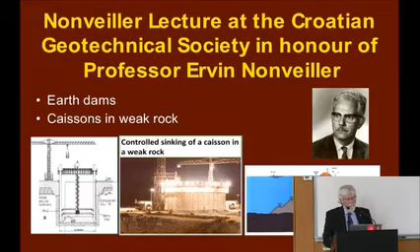In looking at the past history of the work done by Professor Nonveiller, I noticed that we had a number of areas of intersection, including earth dams and caissons in weak rock. But what I'd like to talk about today, environmental geotechnics, has all been developed since he retired.

It is a relatively young sub-area of geotechnique. It includes some very broadly defined areas, including erosion protection, stability in extreme events, management of water in extreme events, and reducing greenhouse gases and global warming.

But what I would like to particularly speak to in this presentation are two issues: the protection of ground and surface water, for example, landfill barrier systems for municipal solid waste, low-level radioactive waste, mine tailings, heap leach pads, and deep disposal of high-level radioactive waste will be touched upon at the very end. And of course, the other aspect is remediation of past sins and contaminated land.

The presentation has two conceptual parts. The first is looking back at the advances that we have made over the last 30 years in understanding different components of a barrier system. We'll be talking about advective diffusive transport through clay liners, and about the importance of leachate collection in landfills and of geomembranes.

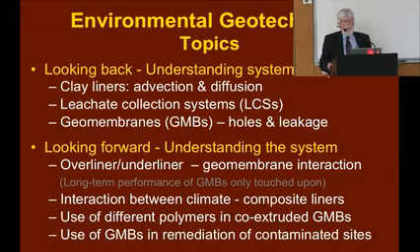But we're also going to talk about the system itself and how the various components of the system interact. We'll talk about the interaction between the geomembrane and under and over liners, the interaction with climate, the use of different polymers, and geomembranes in remediation.

But first, let us start with some basics. There are two transport mechanisms that we have to talk about. One is advection, and that is the movement of contaminants, suspended solids, be they dissolved atoms or molecules, with moving water or leachate. And this is related to Darcy's law.

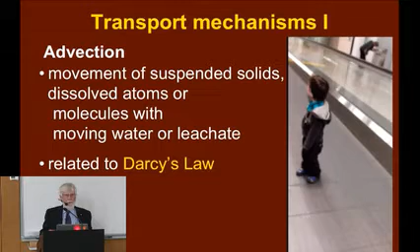To give you an analogy, if we picture this moving walkway in an airport, then the movement of people is going to be related to their concentration, the number of people per square meter on the moving walkway, and the speed of the walkway. So when we're dealing with groundwater, its flux is controlled by something we know very well, the Darcy flux. We'll come back to that.

The second mechanism is a molecular process called diffusion. It is the movement of atoms or molecules due to a concentration gradient, and it can occur with no fluid flow. For example, if we turned off the air conditioning in this room and I opened a bottle of perfume and poured it on this lectern, very soon people would be able to smell it at the back of the room, as it diffused from high concentration at the front to low concentration at the back.

And just as perfume can diffuse through air, it can diffuse through water, contaminants can diffuse through soil, and in some cases even through solid geomembranes. This diffusion process is related to Fick's law. What happens with diffusion is we have a large number of molecules bumping against each other, and they migrate through some medium, be it a soil or a geomembrane, from high concentration to low concentration.

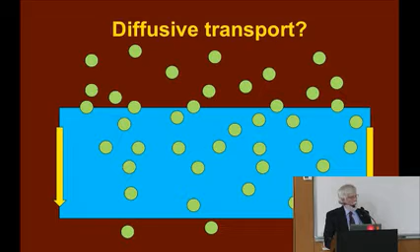So if we consider the advective transport, it is going to be governed by two things. The first we know very well as geotechnical engineers, and that is Darcy's law, which says that the Darcy flux is equal to the hydraulic conductivity times the hydraulic gradient. Now, if we talk about advective transport, we have to bring in concentration of contaminant, so it's simply the concentration of contaminant times the Darcy flux.

And so that flux is related to a resistance. In this case, that resistance is our good friend, the hydraulic conductivity, and a driving force, which is the hydraulic gradient. And if we want to minimize advective flux, there are two things we can do: we can reduce the hydraulic conductivity, or we can reduce the hydraulic gradient.

Now, if we talk about diffusion, it's controlled by Fick's law, which looks very similar to Darcy's law. We have a diffusion coefficient times a concentration gradient.

So let us talk about these various components, and we're going to start with clay. And why not start with compacted clay? Over the last 3 decades, we have come to really understand very well the hydraulic conductivity of compacted clay.

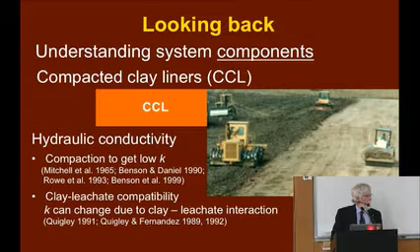Of course, as geotechnical engineers, we have understood hydraulic conductivity with respect to clean waters through dams for a very long time. But what is different about contaminant issues is that hydraulic conductivity is no longer a constant. It can vary because of chemical interaction with contaminants in the leachate. But we understand that pretty well now. We've made good progress there.

What about diffusion? That is much less familiar to geotechnical engineers. But we have great natural analogues since the last glaciation. For example, in Canada, the retreat of the glaciers laid down thick deposits of clay material overlying saline bedrock. Over the last 10 to 12,000 years, salts have been diffusing up through what were clean water, lacustrine deposits.

Now, what about compacted clay in a landfill? We see it there, it just happens a lot faster. Here are 2 profiles from the Keele Valley landfill in Toronto, Canada, taken after only 4¼ years. On the left-hand side, the advective transport through this low hydraulic conductivity clay liner is less than 2 centimeters. But in 4¼ years, chloride has diffused over 80 centimeters. And we can predict it with the same diffusion coefficient that we've used for 10,000 years of data.

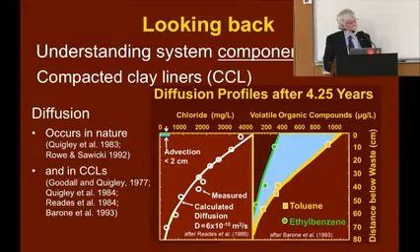It's not just chloride that diffuses, so too do organic compounds, as you can see here for toluene and ethylbenzene. They've migrated almost as far as chloride. So when you have low permeability, you really have to think also about diffusion.

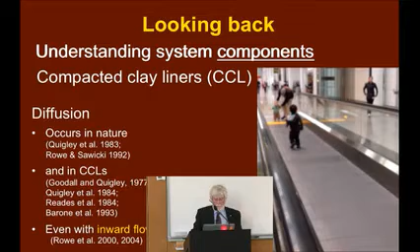Now, I mentioned that diffusion can occur even when you have flow in the opposite direction. We've seen an analogy to that in an airport if you've been waiting and you see a bored child running the wrong way on a moving walkway. Just as that little boy could run against the flow of the walkway, so contaminants can diffuse against an inward gradient. And all of this is entirely predictable.

We must maintain that inward gradient if we want hydraulic containment. But we can't ignore our old friend diffusion. We also have to look at what contaminants can migrate by diffusion out of the landfill, and in fact, that is what controlled this particular design. Now, one of the things that will be obvious to you here is that the whole concept is totally dependent on an effective leachate collection system, and we need it to last for a long time.

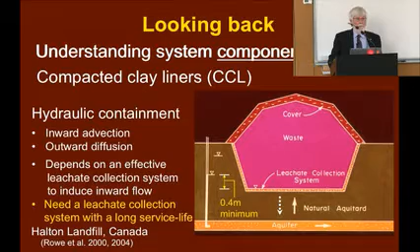So that brings us to leachate collection systems, and we've made great advances there in the last 30 years. If we go back to the 1970s, in some places the 1980s, and some places still today, what they used was a pile of gravel with perhaps a pipe in it, perhaps wrapped in a geotextile, at a spacing somewhere between 50 and maybe 200 meters, what some people call a French drain system. But this is a disaster, because very quickly you get a reduction in hydraulic conductivity in the gravel and in the geotextile, and as that happens, your leachate mound builds up and you get more contaminant transport through your liner because you have a larger downward gradient.

This is a poor design. Don't do it. One of the reasons it's a poor design is the geotextile used to wrap pipes - there's a good reason for doing that in many applications, but it's not the right thing to do in a landfill. This geotextile started with a hydraulic conductivity of about 2 times 10 to the minus 3 meters per second. That's pretty good to a geotechnical engineer. But after a few years, that had dropped by 4 to 5 orders of magnitude to 6 times 10 to the minus 8 meters per second. And now it is not effective at collecting leachate.

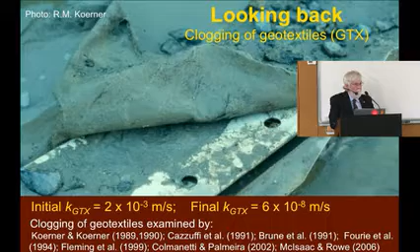And it's not just geotextiles. Sand laid out as a blanket will clog. At the Keele Valley landfill, in a few years, just a couple of years, it had completely clogged and became part of the diffusion barrier, not part of the drainage layer.

This is what we call gravel, less than 10 millimeters. So 10 millimeter gravel - look at it. It's not often you pick up gravel like a piece of concrete, but that's effectively what it's become because of clogging. And this is coarser, 37 millimeter gravel, and you can see it is cemented together.

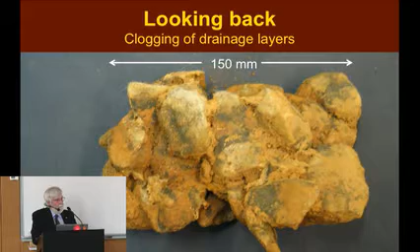So we have to think about that when we're designing our systems. Those bacteria are not benign. They can work for us or against us, depending on how smart we are. And we have to think about the pipes.

Here is an exhumation we did in the early stages of the Keele Valley landfill because the pipe had clogged. Why had it clogged? Because they'd never cleaned it. As you probably know, if you don't clean your teeth, plaque will build up and you'll find yourself having a nasty time at the dentist. That doesn't just apply to humans.

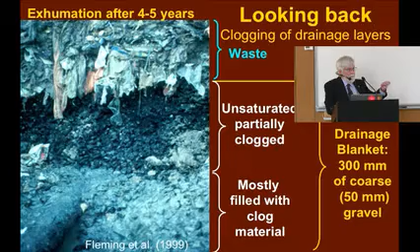It also applies to pipes in the leachate collection system. If you don't clean them, a plaque, a biofilm builds up, and then it becomes solid, and then thicker and thicker. Between 4 and 5 years, you can see this pipe is more than half full of clogged material. Here is a piece we've just removed from the pipe, and this is the same piece after it has oxidized. You'll see it has the appearance of a weak concrete. And that is essentially what it is - a weak concrete formed by bacteria in that pipe in the space of 5 years because they hadn't cleaned it.

So what have we learnt? We've learnt that leachate collection systems have a finite service life, but we can extend it by appropriate design, construction and operations. You need a uniform, coarse gravel layer. You need a suitable filter. Geotextiles can become your friend if you put them in the right place. Get them working for you, not against you.

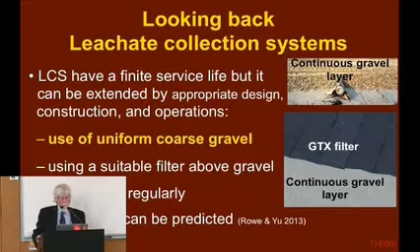Not only should you clean your teeth, you should clean your pipes. And there are techniques available - you can find them on the web - for predicting the service life of leachate collection systems.

So we've just seen a leachate collection system should have a relatively coarse, relatively uniform gravel. Somewhere not far below the leachate collection system often is a geomembrane, a sheet of plastic. And as we know, plastic holds water very well, except if it has a hole. So we need to think about holes.

Two quotes from my old friend J.P. Giroud: all liners leak. And rather than pursuing the unrealistic goal of zero leakage, it is preferable to discuss the limit between acceptable and unacceptable leakage.

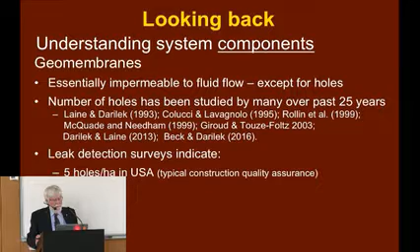So the place to begin clearly is holes. This has been widely studied over the past 25 years, with lots of references in the literature. And what's become a little bit more common, but still not that common, is leak detection surveys. When you do a survey like that, you discover interesting things - like the typical number of holes per hectare in the United States is about 5 holes per hectare, with typical quality assurance procedures. But when you put the gravel drainage layer on top, that can easily go to over 20 holes per hectare.

Now, I said that leak detection systems can help you identify and therefore fix these holes. But in 2014, in the United States, only 2% of the geomembrane had a leak detection survey. Quebec, Canada was probably the best - 21%, which is 10 times better, but still only one fifth of all the area was checked.

So if you want low leakage through a geomembrane, the first thing you need is good quality assurance. That means somebody out in the field who knows what they're doing, who's on site and not in the trailer filling in forms, but there with a pair of eyes watching what's going on. Because a bulldozer blade takes a few seconds to put a hole in a geomembrane and a few more minutes to cover it up if somebody's not watching. There's an old adage that I'll repeat to you: you get what you inspect, not what you expect.

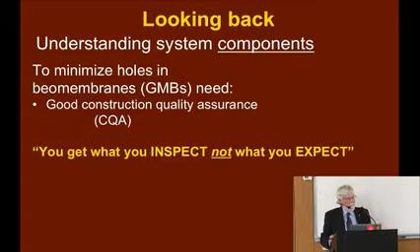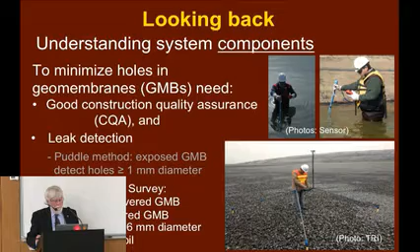When it's covered with water, or covered with soil, you need something like the dipole survey method. With up to 0.6 meters of soil under the right conditions, you can detect holes of 6 millimeters or greater in diameter. So it doesn't eliminate the holes, but you can substantially reduce what is there.

So if all liners leak, we should be discussing what is acceptable leakage. What is acceptable? The answer is, it depends on your particular situation.

If we look at this dam in Italy that's had a geomembrane liner in place for almost 30 years, there's a geomembrane, then a geonet drainage layer, and then the concrete of the dam wall.

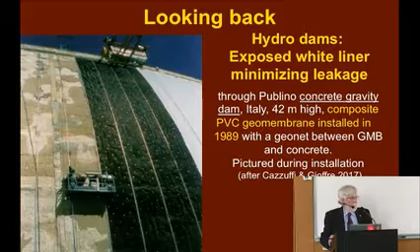And so one could estimate, and indeed because there's a drainage layer there, you can measure what the leakage is. Here's another project I worked on recently in Israel, a pump storage scheme. It's lined with a white plastic, high-density polyethylene geomembrane, and that geomembrane is left exposed.

This is another dam I've worked on recently, in Ontario, and here you can see a geomembrane that is being covered in the bottom of a dam.

So what is the leakage? If we have, as we saw in that Italian case, a geomembrane with a drainage layer adjacent to it, then we can very easily calculate the leakage using Bernoulli's equation.

Let's do that, assuming we have, say, 5 meters head above a hole, and 5 holes per hectare, remember that was the typical value found in the United States with good quality assurance. If our hole is 1 millimeter in diameter, the leakage can be easily calculated to be 2,000 litres per hectare per day. That's a strange unit, but it's what is typically used when we deal with geomembranes, and it's abbreviated to LPHD, litres per hectare per day.

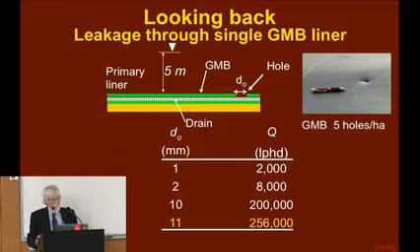Now, is that acceptable? Well, for a hydro dam, it may be perfectly acceptable. But what if it's contaminated water? Then it may be totally unacceptable. So what is acceptable depends on your application.

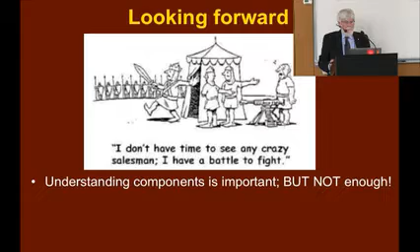So what I've tried to illustrate so far is that we've made great progress understanding things like compacted clay liners and their hydraulic conductivity, diffusion through clay liners. We've understood leachate collection systems and how to design them so they don't fail. We've understood how to calculate leakage through geomembranes. And that's great, but it is not enough.

It is not enough to understand the components. We have to also understand the system, and in particular, understand how the components of the system interact. This can be very important because sometimes we get so excited optimizing one part of the system, like a leachate collection system, that we don't think about what it's going to do to the geomembrane underneath it.

And that has resulted in failures. Indeed, there are some regulations in the world that were written thinking about components, that when you put the whole system together, are actually counterproductive. They're bad regulations.

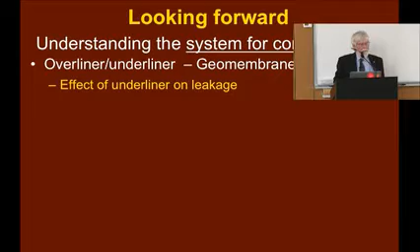So let's look forward. Let's look at understanding the system. A good place to start is with our friend the geomembrane, understanding how it interacts with what's around it, because it's not often that it is in a dam wall with water on one side and a drain on the other side. It does happen, but not that often.

If we do have it, as we just saw a moment ago, and if we take our hole to be 11 millimeters in diameter, our leakage is 256,000, let's say 260,000 litres per hectare per day.

Okay, so what if we had sand instead of a very permeable geonet? That sand has a hydraulic conductivity of 10 to the minus 4th meters per second, which I think we'd all agree is not a bad drain. In fact, it's a good drain. And the leakage is just the same as with our geonet.

Now let's suppose instead of sand, it's a silt with a hydraulic conductivity of 10 to the minus 6. Well, we start to have an effect. There is an interaction between the geomembrane and the soil that reduces the leakage to 100,000 litres per hectare per day.

And if it's a till at 10 to the minus 8 metres per second—a till is a well-graded material, I'm not sure if you use that term in Croatia, it's a very common one in Canada—tills are deposited by glaciers, and they have a range of silts, sands, gravels and boulders. That material is not bad. It gets us down to 1,000 litres per hectare per day. Two orders of magnitude reduction in hydraulic conductivity here gives us a two order of magnitude reduction in leakage.

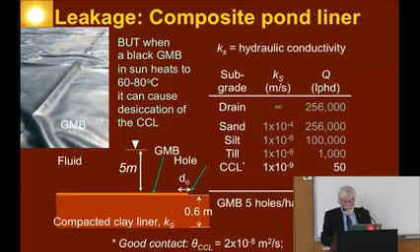However, if we leave our black geomembrane out in the sun, even in Canada it gets to 60 degrees Celsius. If you get to Texas, it gets to 80 degrees Celsius. And what that does is it causes water to evaporate from the clay, especially at the top, and migrate to where the airspace is, which is the wrinkles you can see here—these are wrinkles caused by expansion of the polyethylene when it gets hot. And if we do that, what we can end up with is this: desiccation of the clay liner.

Now, on one hand, you might be tempted to say, well, it's just a few centimetres, what does it matter? Well, it matters a very great deal, because now the water can easily migrate through that fractured network at the top over the entire surface. So we now get an increase in leakage from the lovely 50 we had before to 8,000 litres per hectare per day—all because of construction considerations. This is probably not what the designer expected, but it's what you can expect if you don't pay attention.

So what are some solutions? Well, one solution is to use a white geomembrane. It doesn't solve the problem, but it helps, because it drops the temperature in our measurements by about 20 degrees on a hot day. What this illustrates is we have to consider the interaction between the liner system and climate. A white geomembrane helps. A GCL, a geosynthetic clay liner, either with or as a replacement for the compacted clay, is a good thing to consider.

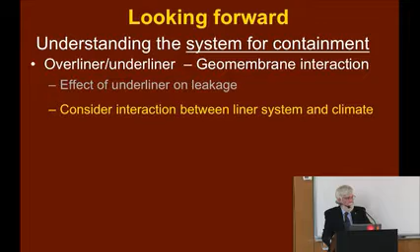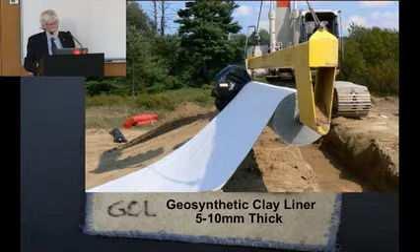Oh, but what is a GCL? I haven't introduced that to you, so it must be time to do so. A GCL is a manufactured product. It comes in a roll, as you see here, typically 5 to 10 millimeters thick off the roll. In 95% of the cases, it is a layer of bentonite, typically sodium bentonite, not always but mostly, sandwiched between two geotextiles, and all needle punched together to hold it together, first and foremost, so it can be rolled up and easily laid out on site.

Now, bentonite on the roll has a low water content. And for bentonite to have a low hydraulic conductivity, it has to be hydrated. So where does it get its water? Well, basically, it sucks it up from the soil beneath it. And a GCL taking up moisture from a good subgrade will typically have a hydraulic conductivity less than 5 times 10 to the minus 11 meters per second with respect to water.

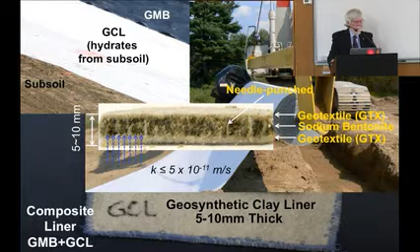And for that reason, we often use a geomembrane together with a GCL on a subgrade as a composite liner, and they've been very effectively used for more than 20 years. But we do need to pay attention here too—it's not just compacted clay that can be affected by our interaction with climate.

It's to study this particular problem that we first built the Queen's University Environmental Liner Test Site, or QELTS. It's located just north of Kingston in Ontario, Canada. We've built it once, monitored it for 6 years, then completely pulled it apart and rebuilt it, and we've now been monitoring it for another 6 years. We're studying many things, but the one thing I want to talk about today is shrinkage.

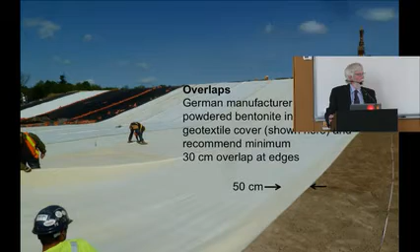To put this in context, GCLs come in a roll, they're laid out like this, and depending on the manufacturer there will be different recommendations about how you seal the overlaps. One manufacturer, a German company, impregnates bentonite in the 50 centimeters from each edge, and they recommend overlapping by 30 centimeters. That impregnated bentonite provides a seal between the two geotextiles, and remember, geotextiles can be permeable.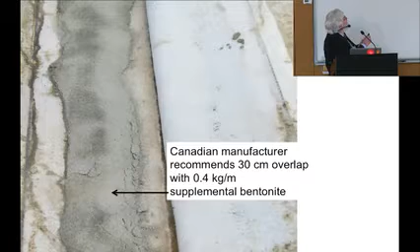We need the bentonite to seal it. Now that's not the only way to do it. Here is a Canadian manufacturer who recommends placing 0.4 of a kilogram per meter of supplemental bentonite between the lower and the upper panel. You can see I folded back the upper panel here so you can see the bentonite. They also recommend a 30 centimeter overlap. Here's a third option: a US manufacturer who puts in a groove, typically about 7 to 8 centimeters from the edge of the roll, relying on the bentonite that comes from that groove to provide the seal. This manufacturer typically recommends a 15 centimeter overlap.

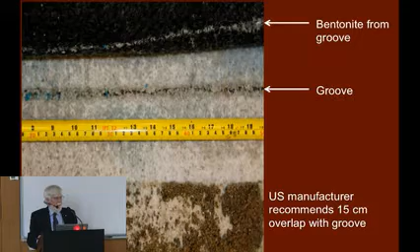Okay, well, that's all well and good. Under the right conditions, all of those systems work. Well, what are the right conditions?

One of the good ways to find out is to read the manufacturer's instructions. Unfortunately, not only do we typically not read other instructions, we often don't read the manufacturer's instructions. If we read them, they would say, whether you use the GCL alone or as part of a composite liner, cover it in a timely manner. Unfortunately, this is a recommendation more honoured in the breach than the observance. Very commonly, composite liners are left exposed for months, and in the case of side slopes, often for years before they are covered.

So the question we should ask ourselves is, what are the consequences of that? And the answer is, it depends.

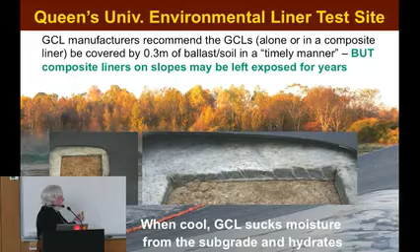Let's begin with what we'd like to happen, and often, in fact, it does happen. We put the GCL on top of the subgrade, the geomembrane on top of that, and the GCL sucks up the water. Relatively quickly you get this nice gel-like structure. This has got low hydraulic conductivity. This is beautiful. If it stays like that, we'll be really happy.

But if we leave our black geomembrane out in the sun, it is going to get hot. And when it gets hot, not only will water evaporate from a compacted clay liner, it will also evaporate from our GCL. And when it goes into the air, where is most of the air? In the wrinkles, which are where the geomembrane has buckled as it expanded. And when the geomembrane cools, that water condenses, but it doesn't go back to where it came from.

We're going to look at one of the consequences of that, and remember, this is all about weather, how things happen in real life. This is data from our air temperature monitor at the QELTS site. Now QELTS is at latitude 44 degrees, 34 minutes north. Interestingly, that's a little south of where we are right now in Zagreb. Zagreb, when I looked it up, was 45 degrees, 48 minutes north of the equator. So Canada's not all a long way north.

This is what the weather looks like at our QELTS site. You can see in the summer we can be up to, in this year, about 32 degrees Celsius. In the winter it got down to about minus 28, with ups and downs in between. Now that's the ambient temperature, but the geomembrane is a very different creature. Look at it, it rarely dropped below freezing. Lowest it got to is minus 5. But it got up in this particular year to almost 60 degrees Celsius.

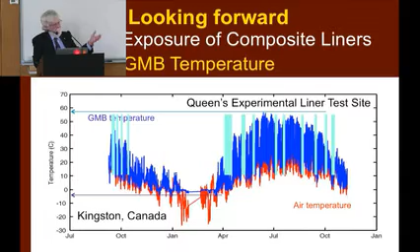And look at those cycles. The ones I've highlighted in aqua and light green show a period for it to hydrate, followed by a very hot period. So our GCL is going to have time to suck up water, then it's going to have a period when it's hot and it evaporates water. It sucks up, it evaporates, it sucks up, it evaporates.

Well, what does this do? Here we see a GCL specimen. This is a very common GCL, I've even seen it in the labs here at Zagreb today. You can see this specimen starts off parallel to this yellow line and this yellow line. What we're going to do is look at some time-lapse photography where we wet it and then allow it to dry overnight. Then we wet it again, allow it to dry out overnight, and let's see what happens.

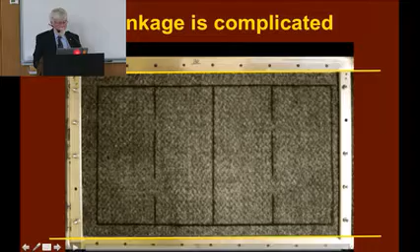And you can see after a few cycles, it is no longer aligned where it started. It has shrunk.

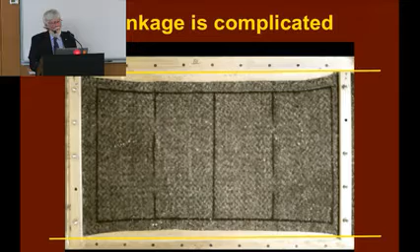Okay, well that's all very nice and good. You know that certain clothing items, if you don't look after them properly after you wash them, will shrink. You now know that some GCLs will shrink. Why do we care? The answer comes back to the overlaps.

So this is what we would like to see. And here we have our overlap. We have our supplemental bentonite, which provides a resistance against flow between the two panels. And as it's shown there, it's exactly as we would like to see it.

But let's suppose that GCL panel shrinks. Once it shrinks away from the supplemental bentonite, now remember that how much supplemental bentonite you've got depends on which manufacturer's guidelines you followed. Three very different answers you could get. But once it shrinks away from that supplemental bentonite, now we have a clear flow path between the panels, even if an overlap exists when you look at it with your eyes.

So you could walk on it and say, oh, that looks all right. What you can't see is that it may have shrunk away from the bentonite. Now, in some methods of doing it, that's much less likely than other methods. So think about that. Here's an obvious problem. Now we have a gap. So now we have a geomembrane with a drain beneath it.

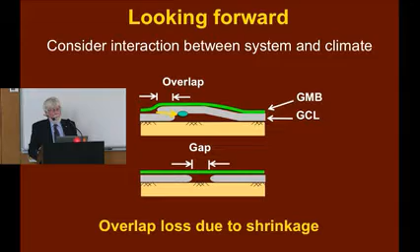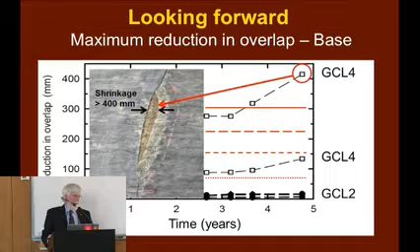That's good. Now we looked at what happened if that overlap shrunk so it was only 50 millimeters, and so that the supplemental bentonite was disengaged. So visually it looks okay if you're looking at it from the top.

But the leakage increased by a millionfold. This matters.

So shrinkage depends on how the GCL is manufactured. It depends on your field site conditions. But if you want to minimize it, the first and best thing to do is follow the manufacturer's instructions.

Cover it as quickly as possible, and if you do that, none of the GCLs will give you a problem. If you can't do that, then you have to be a lot more careful. Now you have to select a GCL to minimize your risk. They are not all the same.

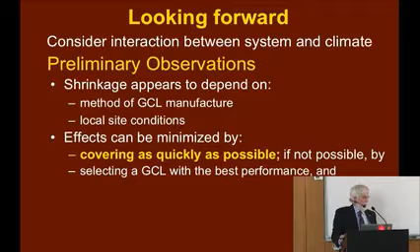You need to ensure an adequate overlap. I would recommend 300 millimetres. You can do something called heat tacking the seams sometimes, and that helps, but it's not a guaranteed solution.

A white geomembrane reduces the thermal cycles. It helps, but it is not a solution. The solution is to cover in a timely manner.

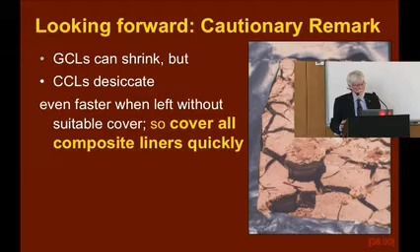So GCLs can shrink, but compacted clay can desiccate even faster. So you have to be careful with what's going on in construction. Shrinkage can be minimized by appropriate design and construction.

Okay, we've talked about what's underneath the geomembrane. Let's talk about what's on top of it.

If we look at what we've already discussed, we've seen that if we have a subgrade at 10 to the minus 6, and a permeable material directly on top of it or nothing on top of it, our leakage is 80,000 litres per hectare per day. If we were putting a cover soil on top at 10 to the minus 5 metres per second, so it's a sandy material with a bit of silt maybe, and we've got the same subgrade at 10 to the minus 6, we drop the leakage to about 70,000 litres per hectare per day. Not very much.

That cover soil above it generally has very little effect. But what if that cover was thick and of a significantly lower permeability? Where, you might ask, would you find that? My answer is a tailings storage facility.

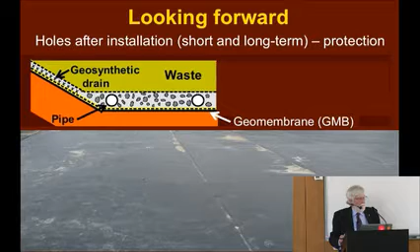Okay, so we've been talking about holes after installation. One of the important things we need to think about is how we protect our geomembrane. We've talked about it being good to have a coarse, uniform gravel drainage layer. But if we put that directly on the geomembrane, it's probably not going to be very kind to it. Well, people recognise that and put on a protection layer, typically a geotextile protection layer.

You can see one here. Then you put gravel on. If we're lucky, it's nice, rounded river gravel. But we're not often that lucky. Often it's crushed gravel that looks like this. So what does that do to the geomembrane?

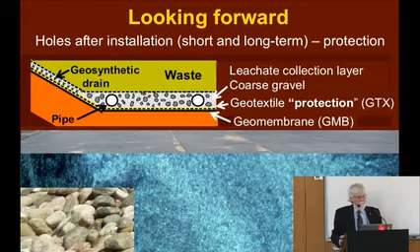Well, to find out, let's build a liner system. We'll put a foundation layer, a GCL, a geomembrane, a geotextile, some gravel, and in our landfill liner simulators, we can load that up to 3 megapascals. Too big for a landfill - landfill is typically less than 1 megapascal - but for a heap leach pad in mining, even 3 megapascals is not the top end.

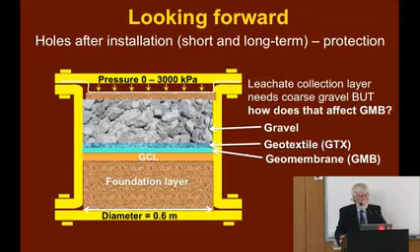And we can ask ourselves, how would this drainage layer, either in a landfill or in a heap leach pad, affect the geomembrane? So here is the material being placed, a foundation layer, a nice pristine geomembrane. Here's the gravel that's being used.

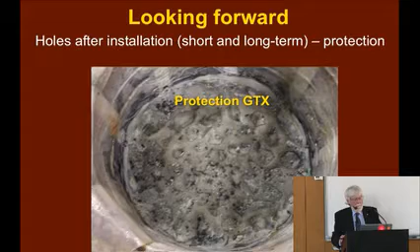Now we've loaded it to 250 kilopascals and we're taking off the gravel. This is the protection layer, and you can see the indentations in it. As we pull back that geotextile and look at the geomembrane, you can see that those gravel particles have indented through the geotextile into the geomembrane. In fact, you can appreciate, even if there are no holes, there are some big strains.

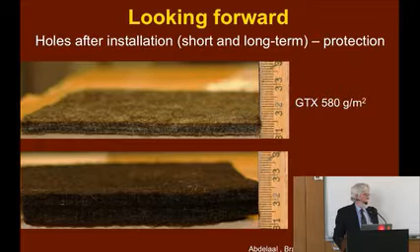Let's ask ourselves, what's the effect of the mass of that geotextile? Well, if we have none, at 250 kPa, which is a medium-sized landfill, maybe 20 meters of waste, we get strains of 17%. To put that in context, the Germans, Seeger and Müller, made a recommendation, which I think is a very good one, not to exceed a strain of 3%. If we take that as a guideline, clearly 17% doesn't meet it.

If we use a light geotextile, we get 10%. A reasonably heavy one, roughly twice what is typically used, we're down to about 7.7%. A 2,000 gram geotextile, we're at 5.5%. With 150 millimeters of sand, we're at 0.2%. Draw your own conclusion.

Now, why do we care? If there's no hole initially, why do we care? The answer is, where the geomembrane will fail is where there are tensile strains. And let me prove that to you.

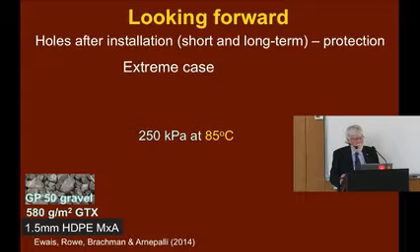Let's take a geomembrane 1.5 millimeters thick. We'll put on a typical North American geotextile protection layer of about 600 grams per square meter, and a typical drainage layer used in Ontario, where I live, 50 millimeter gravel. We'll take a medium-sized landfill, 250 kilopascals, but this data we'll do at 85 degrees. That's pretty extreme, so things happen a bit faster.

At 20 months, we had one crack. One crack doesn't sound so bad until we remember it's a 0.6 meter diameter specimen, and we're used to talking about holes per hectare. So what does that mean in holes per hectare? It means 35,000 holes per hectare. That's getting to be a large number.

But even more importantly, once the cracks start, they grow exponentially. So this is at 20 months. At 24 months, we have 400,000 holes per hectare. At 25 months, 1.4 million holes per hectare. And at 25.5 months, 2.2 million holes per hectare.

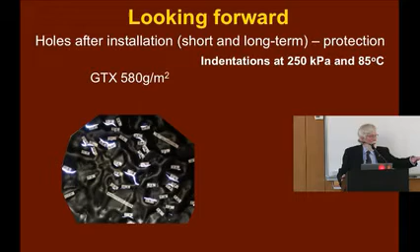And that's what the geomembrane looked like. I think we can probably agree it has reached the end of its service life. You see the light because we're sitting on a light table. So there are quite significant cracks there, both in width and in length.

So with a 600 gram protection layer, we've got strains up to about 15% and 2 million holes per hectare when it starts to crack. And that happened within 3 years.

This is exactly the same geomembrane under exactly the same conditions with one exception. We used a 150 millimeter sand protection layer. And it looks as beautiful as the day it was put in. That test has been running now since 2006, so 12 years, not a problem, performing beautifully.

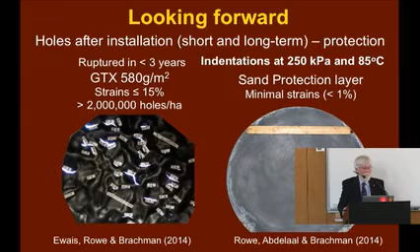It's not about the geomembrane, it's mostly about what we as engineers do in our design. Your protection layer is critical. So, with a very coarse gravel drainage layer, we need a very, very thick geotextile, or, because that's going to be very expensive, maybe a sand protection layer instead.

Now, another way we can get strain is from the consolidation of the waste. As geotechnical engineers, any of you working with piles and soft ground are probably familiar with negative skin friction, when the soil that's consolidating starts to drag down the pile. Well, we have a similar situation for a liner system in a landfill.

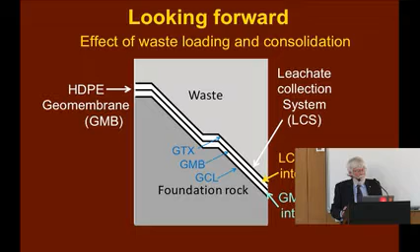We put waste on top of the liner system. The weight of that waste itself tends to drag down because of the friction between the layers, and as it consolidates and degrades and settles more, we get further down drag. And that induces tensions in our geomembrane.

And there are ways to calculate that. Here you see some results for a particular case. I won't go into the details of the case, it's just been published in the Canadian Geotechnical Journal. But you can see near the top of the slope, these are breaks in the slope here.

Near the top of each of these slopes, you get the maximum strain. With a one-to-one slope, it's almost 9% at closure, and with degradation of the waste it increases to about 19%. Compare that to Seeger and Muller's 3%.

With 2-to-1 slopes, at closure we're at 4.4%, after waste degradation 11%. With 3-to-1 slopes, life looks a lot happier - we're at 2 and 2.1%.

So once you go over 3-to-1 slopes, you have to pay a lot of attention to what the strains may be in your particular geomembrane. That may mean you have to use some reinforcement to carry the load so it's not carried by the geomembrane.

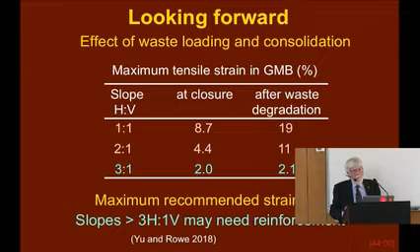So we're getting towards the end here. I have been mostly talking about leakage, but I want to come back for a little while and talk about diffusion. Traditional geomembranes are excellent diffusion barriers to most contaminants in a landfill, anything that's ionic, salts. I've been running a diffusion test continuously for 25 years and have found zero salt getting through a geomembrane.

But for other contaminants, such as benzene, toluene, dichloromethane, TCE, PCE, for a typical geomembrane I only have to run a test 1 to 2 weeks, and it's significantly through the geomembrane. Now what this has caused is the development of new products designed to deal with this situation.

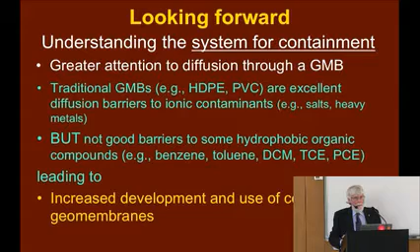So let's look at a diffusion test. Here we have a cell, it has a geomembrane here, a source of contaminants on this side, clean water on that side. We monitor the decrease in concentration in the source and the increase in the receptor. In particular, what I'm going to highlight for you, since maybe many of you have never seen this, is a co-extruded geomembrane.

It has a traditional polyethylene outer core, could be linear low density or high density. But in the core, in the center, it has a material called ethylene vinyl alcohol, or EVOH, which is particularly good at containing or stopping those contaminants that easily get through polyethylene.

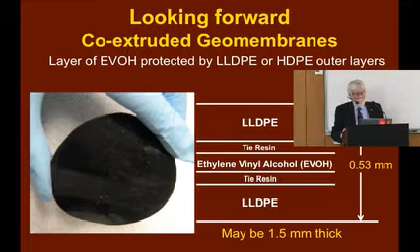We've been running that test now for 8 years, but we predict we're going to have to run it for 16 years before we get to equilibrium. Compare 16 years to 14 days. Not all geomembranes are the same.

Just to give you an example of how this can affect your design: often we have to build over soil that we've tried to clean up - we've made a good effort, but there's a limit to how much you can clean it up economically. And now we want to use it, we want to build on top of it. It's what we call a brownfield site in North America. Let's suppose we want to build a 5-metre high warehouse.

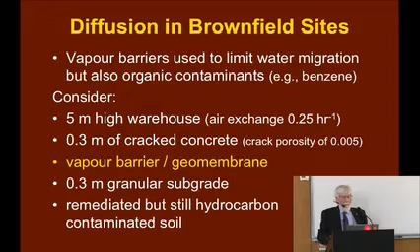In the US, a typical guideline is the NIOSH, and in that building you shouldn't exceed about 3 milligrams per cubic metre.

Now I'm going to finish off by a few words about radioactive waste, because I gather that's of some interest in this part of the world, as it certainly is where I live. We'll start at low level and then we'll finish off with a few words about high level.

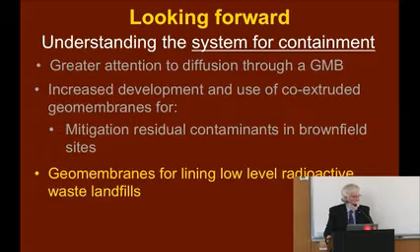So if we have low-level radioactive waste, we need a good liner and a cover. They're typically disposed of in a secure landfill facility. But you need a very long service life. In Canada, we require 500 years after you've finished filling the landfill.

You have to minimize the strains in the geomembranes we've just been talking about. You have to minimize the risks of desiccation, shrinkage, whatever, in your clay liner. And you need to pick the right materials. You need to be very wise in your selection of the particular geomembrane and the GCLs. They are not all the same, even if the basic specifications look the same.

And you need excellent, full-time, knowledgeable quality assurance. Remember, you get what you inspect, not what you expect.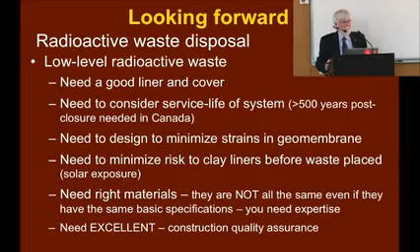So the service life of a geomembrane in a low-level nuclear facility could be reduced if there was significant heat generation, but that is not likely in low-level nuclear waste. So we can pretty well eliminate that.

However, sometimes people like to dispose of low-level waste in a concrete or cementitious matrix. That can have an impact on the pH of the leachate, and you need to think about how that will affect the service life of your geomembrane. Again, not all geomembranes are equal. They have different antioxidant packages. Some will be much better for high pH than others.

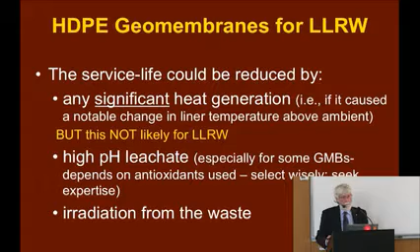Then there's the obvious one: what is the effect of irradiation from the waste? Let's talk about that, because quite a bit of work's been done on that question over the last 20 to 30 years. And the effect of irradiation from low-level nuclear waste, even high level, is very similar to what you get from ultraviolet radiation.

And the biggest impact is going to be the total absorbed dose that the geomembrane experiences. The dose required to cause a drop in break strength or elongation by a factor of 2 is about 2.6 megarad. Let me tell you, when you're dealing with low-level nuclear waste, that is a very large number.

At high doses, the mechanical properties change due to irradiation by a process called chain scission. That is more or less the same process that affects most geomembrane degradation in an environment with oxygen. The geomembrane becomes hard and brittle, and it will stress crack.

Now, a very recent paper, only just published in Geotextiles and Geomembranes, did a nice study that showed that alpha particles only get to a depth of about 0.028 millimeters. Beta particles get to a depth of about 0.5 millimeter.

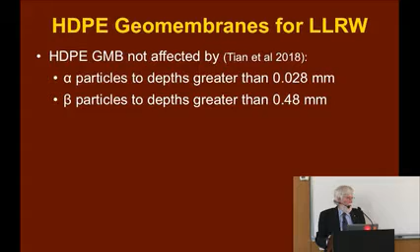They also indicate in this paper that radiation from typical low-level nuclear waste exposure had negligible effect on the depletion of the antioxidants, even if the dose was multiplied 100 times and the service life required was 1,000 years. So that's basically a pretty good news story.

And this particular group, in another paper that was published a year ago, predicted a service life of a 2 millimeter geomembrane, let's call it, of 2,000 years. They predicted in excess of 1,975 years at typical liner temperature of 15 degrees. So, in round numbers, 2 millennia.

There are a couple of other generalizations we can take from what's been published. You need to ensure a suitable resin, antioxidant package, and carbon black. That's what I've been telling you, that not all geomembranes are equal. A thicker geomembrane is going to be better than a thinner one, because remember, the alpha and beta particles have limited depth of penetration. You again have to minimize tensile stresses. And you can lower the radiation dose by how you design it and providing additional shielding.

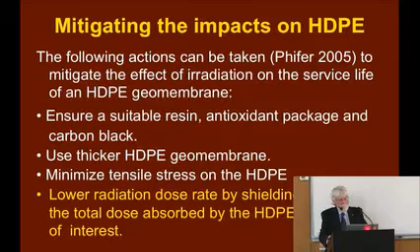So I gave you one prediction of how long a particular geomembrane would last. I'm going to give you another one. This is a geomembrane we tested for 17 years to come up with these projections. And for this particular 2 millimeter geomembrane, we're predicting, let's say, about 900 years at 35 degrees Celsius, over 1,100 years at 20 degrees Celsius, and over 2,000 years at 10 degrees. So there's a completely different study to the last one, but you can see generally consistent findings for high quality products and negligible tensile strains.

Let's conclude by looking very briefly at high-level radioactive waste. And this is very important to us in the province I live in, Ontario, because 50% of our electricity comes from nuclear.

We have 5 plants with 22 reactors, and since the 60s, we've generated 2.7 million used nuclear fuel bundles. And currently, they are sitting in interim storage at those facilities very close to Toronto, which has 6 million people.

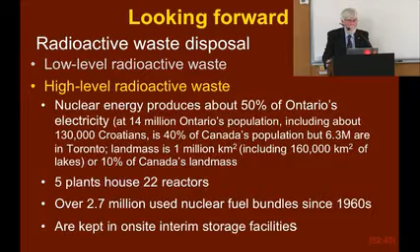It would make sense to do something else with it. The concept being considered is deep burial, and by deep we mean more than 500 meters. Here is a schematic of a facility. If we blow up a part of that diagram, we see a placement room as visualized, and we can see the components: there's a canister with the fuel rods.

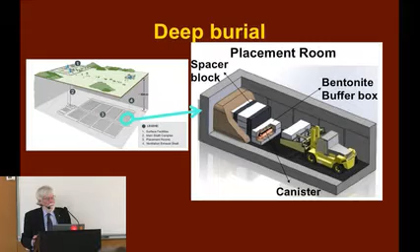We have a bentonite buffer box, a spacer block, and gap-filling bentonite. Bentonite comes into play very importantly in this type of disposal concept. And then we have the host rock. Here you see a blow-up of the bentonite buffer box.

We are actively doing research on this for the Canadian Nuclear Safety Commission. I don't have time to go into the details, but some questions we might be looking at include: how does the bentonite interact with the bedrock groundwater chemistry? Because for the sedimentary rocks in southern Ontario, they have a high salt content - 300 grams per litre, roughly 8 times the concentration of seawater.

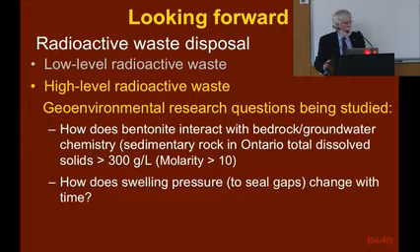Looking at how the swelling pressure to seal gaps changes with time. Looking at how the hydraulic conductivity changes. And what is the effect of thermal gradients? Because here is a situation where we do have to think about the effect of heat.

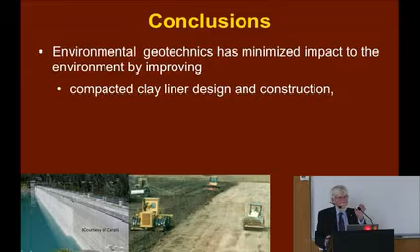So to conclude: there have been great advances in the use of geosynthetics in dams, municipal waste containment, mining, and low-level radioactive waste containment over the last three decades. We've found that environmental geotechnics can reduce impacts and improve the environment through appropriate compacted clay liner design and construction. Remember, I've tried to emphasize that design is critical, but construction is absolutely critical - what you do in construction can ruin the best of design drawings.

Design for minimizing impact due to diffusion. Design leachate collection systems that are going to last. Understand that leakage through geomembranes is a function of the number and size of holes, and therefore you need excellent quality assurance. This is not the place for a client to save money - if they don't have good quality assurance, they have no assurance that they have what they paid for.

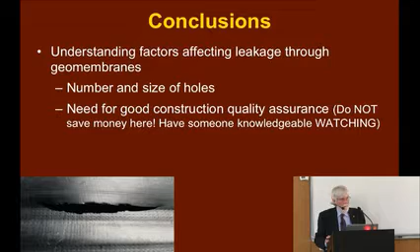Electrical leak detection surveys should be used much more. They cost money, but if it's an important project, you should be doing it. And you need to calculate the leakage you can expect and assess if it's acceptable.

You need to consider the interaction between the components of the liner system - how does a composite liner, which is a geomembrane and a clay, interact? There are various interactions. We've talked about hydraulic conductivity, and there's another very important parameter we didn't have time to talk about called interface transmissivity.

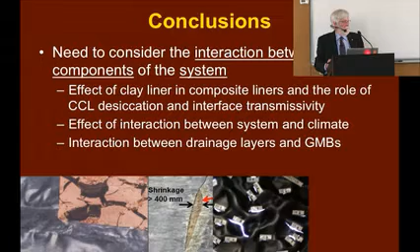We need to think about the interaction of the system and the climate. I focused today on the climate during construction, but in many projects we also have to focus on climate change - the interaction between the drainage layer and the geomembranes, and the effect of consolidation of the waste and degradation on geomembrane strains.

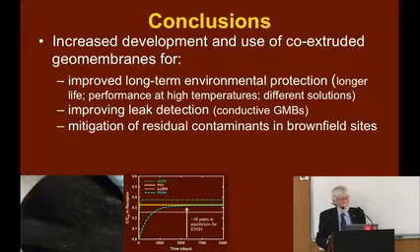We're seeing more novel geomembranes being produced, not just your traditional black plastic. These are being developed for a range of reasons: to provide better environmental protection, to give longer service life, to give better performance at higher temperatures, to give better performance in different exposure conditions and solutions, to improve leak detection, to mitigate residual contaminants in brownfield sites, to remediate contaminated soil, and the containment of low-level radioactive waste - just a few examples of how some of the more complicated geomembranes being produced today are being used.

Now, I've skimmed over a great deal of work in the last hour and a bit. It couldn't have been done without a lot of support, both financial and in-kind, from a large number of manufacturers, consultants, regulatory bodies, installers and contractors. Also, the work I've talked about is not all my work - it's the work of a team of people, a large team in our geoenvironmental group.